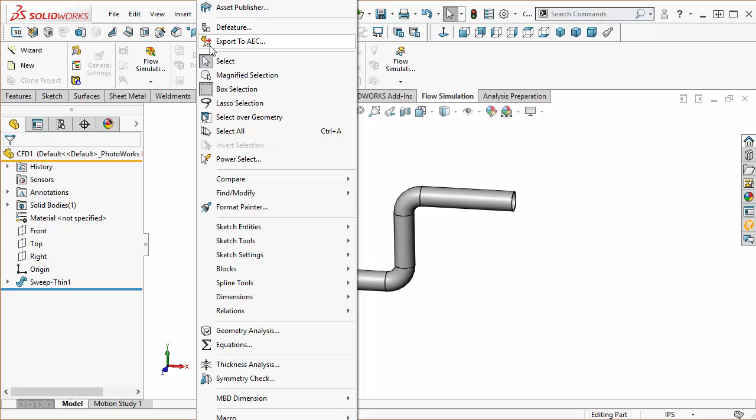First thing you're going to do, make sure you have this Flow Simulation tab open. If not, right click on the toolbar, and at the bottom make sure Flow Simulation is checked. If you can't see it, go up top to Tools, click Add-ins, and this screen should pop up. Make sure SOLIDWORKS Flow Simulation is checked.

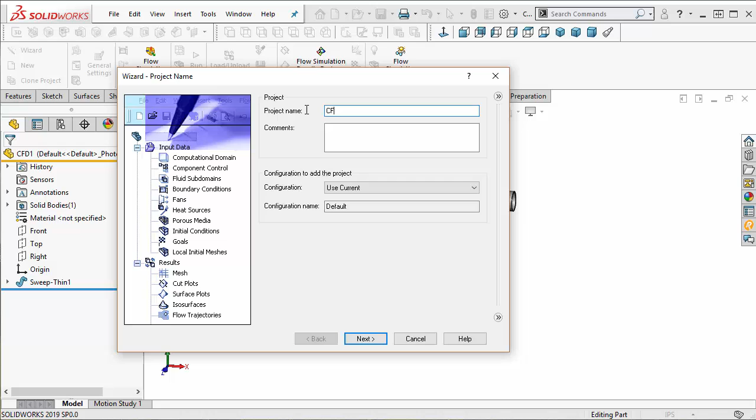So the easiest way to get this started, make sure you're still in the Flow Simulation tab, and click on the wizard in the upper left here. This will start you off with the basic information. You can give your project a name if you'd like, I'll call it CFD Test 1. Click Next. I like to be in the foot-pound-second, so I can do this in terms of CFM, but pick whatever is comfortable for you. Click Next. And these are all fine, so click Next.

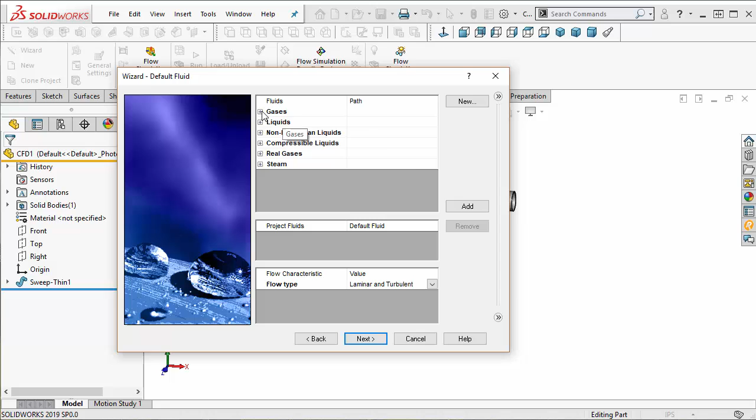Now we need to specify the fluid that we will be simulating. We're just going to use air, so expand gases, click on air, click on add, and click Next. These are all fine also, so click Next. And everything looks fine, so click Finish.

So then this box will pop up telling you your model is not watertight. And since we've got holes in our pipe, it wants us to seal them. You'll see in a minute how this is the way that we tell SOLIDWORKS where our airflow is coming from and going out of. Long story short, just hit yes and it will open the lids tool.

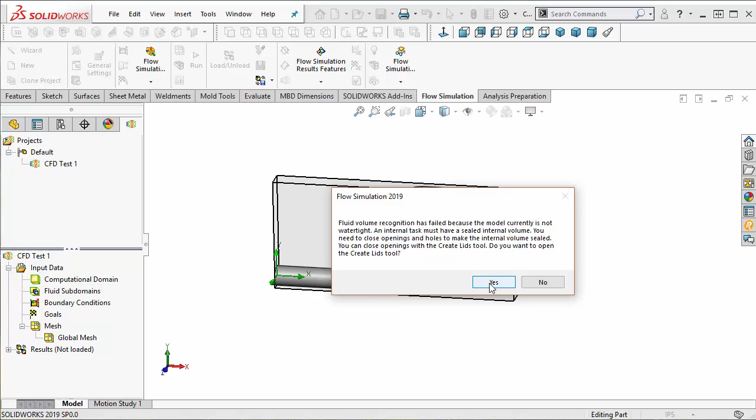To use this tool, all we need to do is click on the plane that we want to add a lid to. So first we'll click on the surface right here, then go to the other end and click right here. And SOLIDWORKS will create the lids. Now our model is watertight.

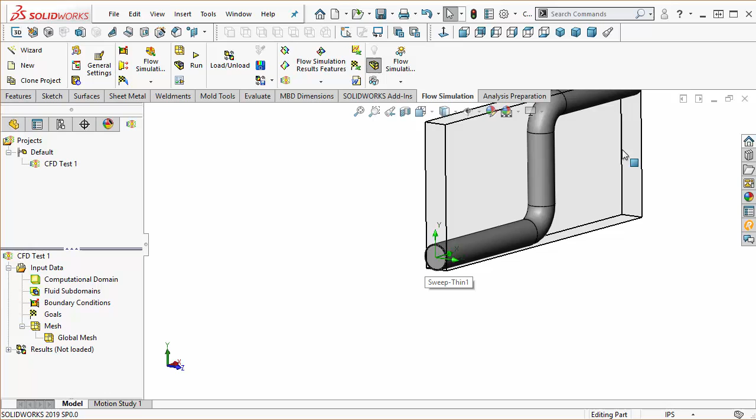To make this process easier, click this cross section and make sure your model splits like this. Basically, we want to easily be able to click on our lids that we just created from inside the model.

Now go to boundary conditions down here. This is where a lot of the work is done. A boundary condition is basically what's going on at the boundaries of your part. Our boundaries are the two lids, so we need to tell SOLIDWORKS where the air is coming from and all that. So click on the inside of this lid, then right-click the boundary conditions and hit Insert Boundary Conditions.

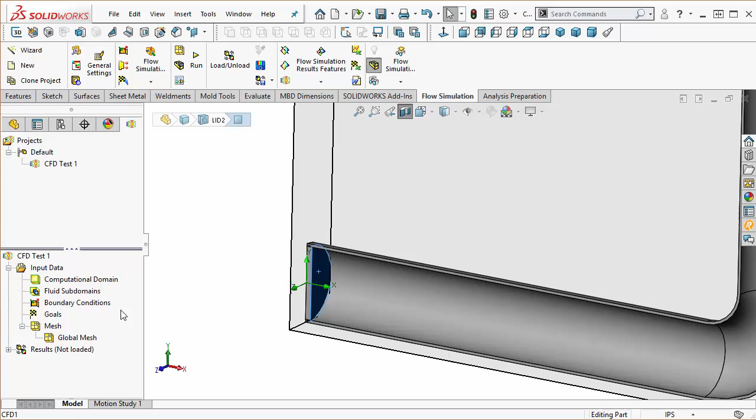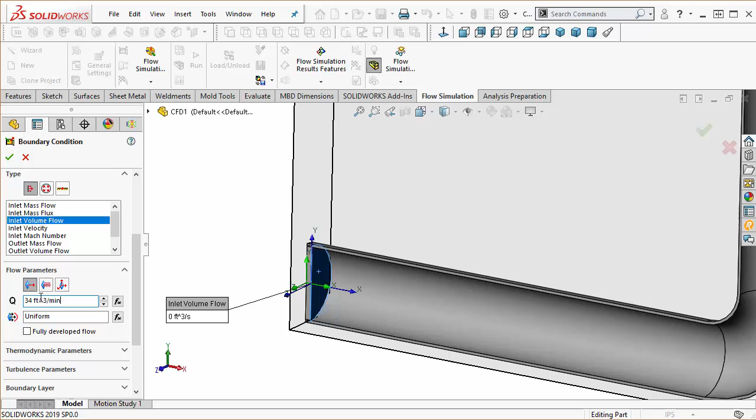This list is where you specify what's happening at the boundary. I like to do CFM, it's a pretty common one, so we'll change this to Inlet Volume Flow. Then we'll go down here and change this to 34 cubic feet per minute. That's what I was using yesterday for some CFD tests I was doing, so I'll just use that value here. Click the checkbox to lock it in.

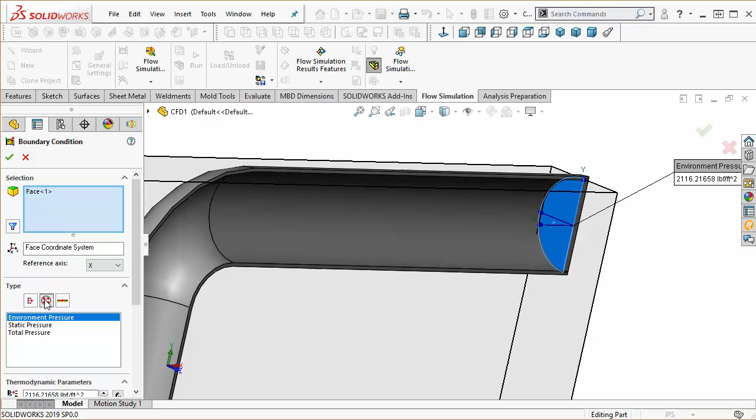Now let's go to the other boundary. This is just going to be an open pipe, so free flow at this side. So click the inside face, right-click boundary condition, and hit Insert Boundary Condition. Now click this middle button here. This is the pressure openings button, and this is how we specify that we just want normal air pressure, like ambient air. Make sure environment pressure is highlighted.

These two boxes down here might be values you're interested in changing. This is just the ambient pressure and temperature if you're concerned with those. But I'll leave these alone, so click the checkbox.

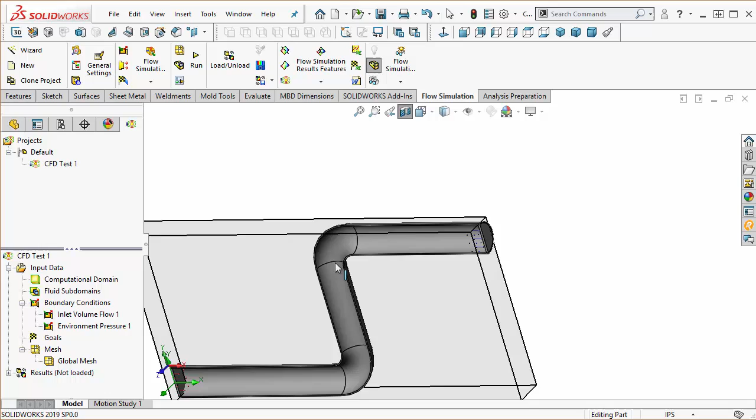Now we're ready to start the simulation. So click Run up here. These are all fine, so click Run again, and this box will pop up, and just let SOLIDWORKS do its thing for a little while. Alright, then it'll say Solver is finished. You can exit out of this box, but what the heck, there's nothing here.

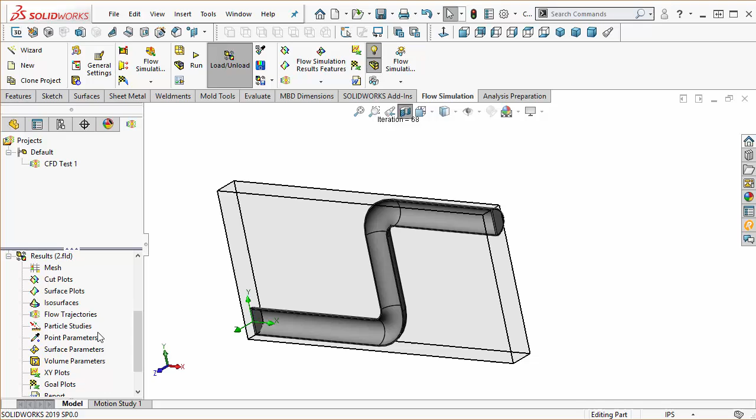Well, SOLIDWORKS doesn't make it that easy. So you need to choose what you show in this model, like how you want to show the results. So open the result menu, and the most common thing you'll probably want to see is this flow trajectories. So right click that and click Insert. Now click the inside of this inlet, that's where the flow is starting.

And one number you might want to play with is this right here. This is how many flow lines will show. We're going to bump this up to 50. The other thing you might want to play with is this drop down. This is the appearance of those flow lines. So I like to do lines with arrows. Alright, then click the checkbox.

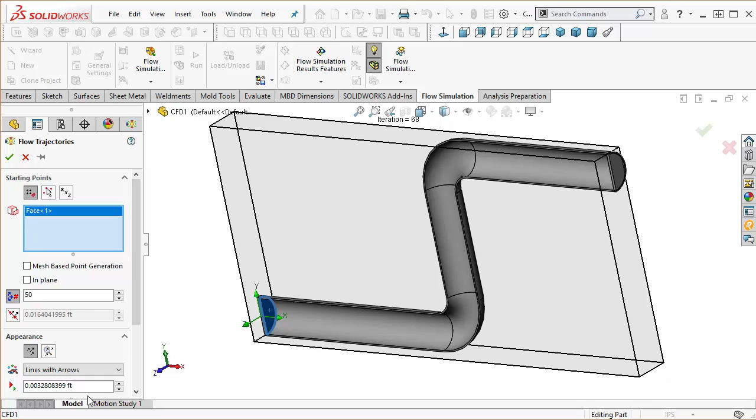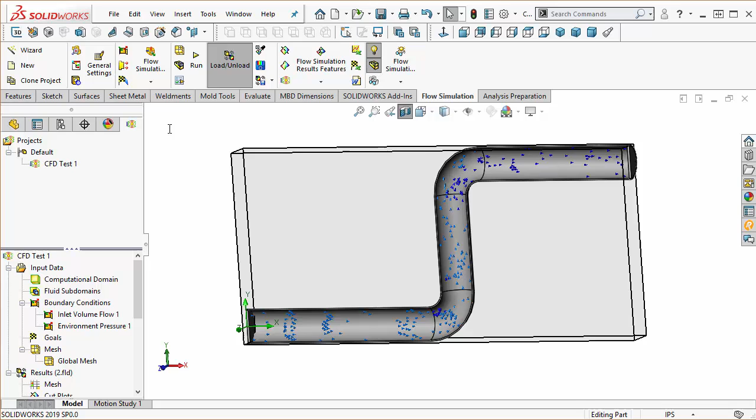The other thing you might want to play with is this box. I like to check velocity. So let's see what that looks like. There we go. Alright, just a quick CFD. Thanks for watching.